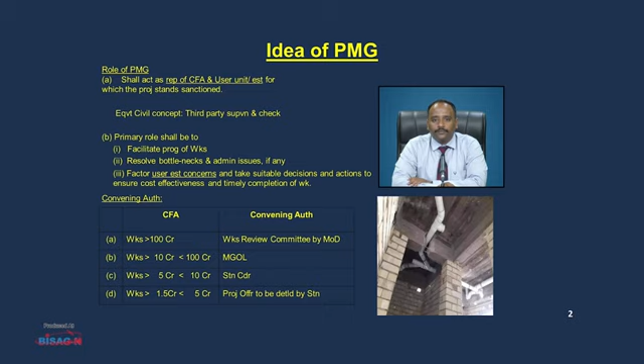What are the various do's for a PMG? The PMG needs to keep its ears and eyes open and use its common sense and involve themselves in the project as if their own house is being constructed.

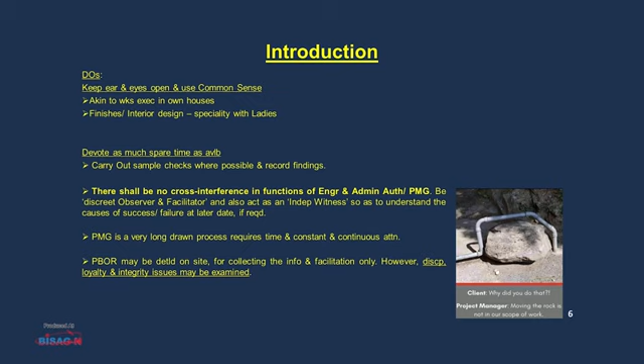The finishes, the interior design and the layout, or any of the modifications which need to be carried out as per the requirements, have to be incorporated and require active participation from the PMG. Also, maximum possible time has to be taken out by the PMG to carry out sample checks where and when possible, and record the findings.

There shall be no cross interference in functioning of the engineers or the administrative authority by the PMG. The PMG has to be a discreet observer and a facilitator, and also act as an independent witness so as to understand the various causes of success or failure at a later stage.

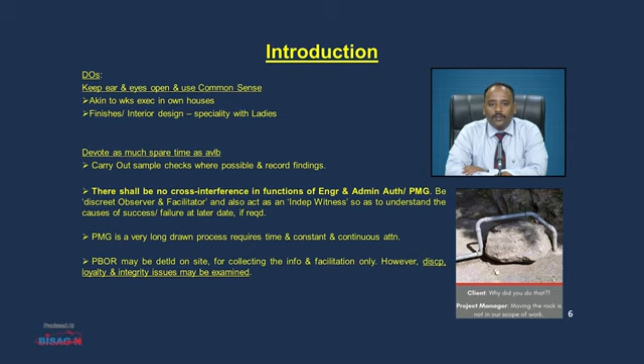The PMG is a long drawn process and requires considerable time, constant and continuous effort of various members of the PMG. The PMG should not discuss the issues arising or their observations with the contractor or his staff. They should be dealing with the various site executives or the engineer channel responsible for the execution of the project.

The contract is an agreement between the Government of India, represented by the Engineer Authority, and the contractor, and hence should not be intervened by a third party, which may lead to litigations at a later stage.

The PMG may remain in line with the work and avoid post checks, which is done by ADG-TE. This will avoid delays in work and should not become a hindrance for the work.

The PMG should not keep the GE, garrison engineer, or his staff engaged for a long period of time. Instead, the office of CWE or the chief engineer may be roped in to clear the doubts.

The PMG may not award an experience certificate or any kind of certification to the contractor or his staff or his vendors for the quality of work being executed.

The idealistic guidelines on the composition of PMG shall be: a presiding officer for the higher CFA works, preferably of the rank of brigadier. For lower CFA works, should be an officer of the rank of colonel.

A representative of the Engineer Authority should ideally be an officer from the chief engineer zone or the CWE, or an engineer officer from MES not below the rank of EE.

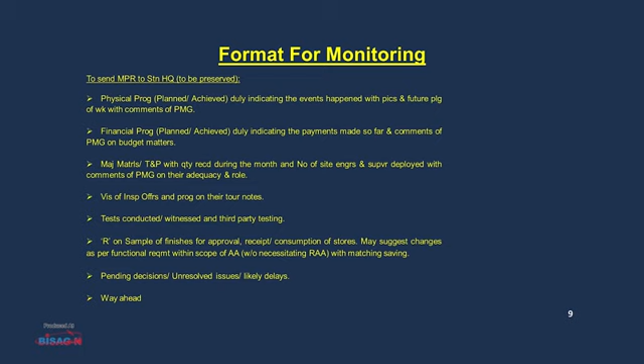Any format as deemed fit by the station should be used for maintaining various records of these PMG meetings, including the CPM chart by the garrison engineer, as the progress of work has to be incorporated while taking PMG on board.

The PMG should check timely initiation and offer comments on approval of samples and finishes, extension of job PDC, and contract PDC. The PMG should record the periodical meetings at least once a month or maximum once a quarter, as per the suitable format deemed fit by the station.

He should update himself with the CPM chart submitted by the contractor as per the progress of work, and ensure that the various approvals are taken on time. The documentation for extension of job PDC is processed in time. The assessment of the project has to be carried out, and any bottlenecks have to be mentioned in the reports regularly to keep the station authorities updated on the developments taking place.

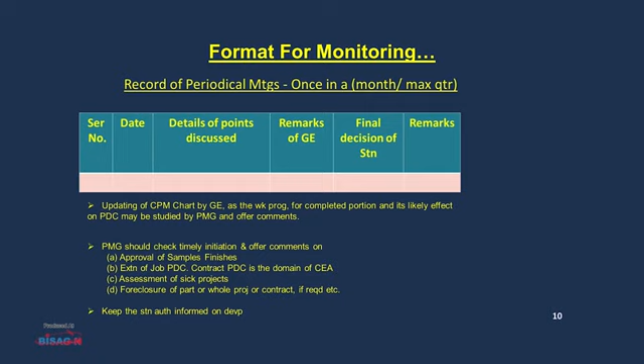The role of PMG at various stages of work: while identification of scope of work and listing of works in AMWP on accord of approval in principle, the PMG or the CO or the works officer of the user unit should finalize the draft site plan by the inter-se layout between various existing buildings, clubbing buildings to make one or few big buildings to save precious land, and finalize the entry and exit, VIP and inspection routes, and additional details of special works like SOC and RIC.

While preparation of the recce cum costing board for issue of AON and administrative approval, the presiding officer is mostly from the user unit. Site visit is a must at this stage. The plot should be frozen as per the zonal plan, not to be changed at a later stage to avoid delays in execution of the project. They are also responsible for preparation of the board proceedings.

Post the AA approval, that is the pre-tender and go-ahead sanction, the PMG is constituted. To maintain continuity, the presiding officer of recce, siting and costing board will be incorporated as presiding officer or member in the PMG. The activities post-tender, during execution, completion, handing-taking over stage, and the financial planning will have to be monitored by the PMG.

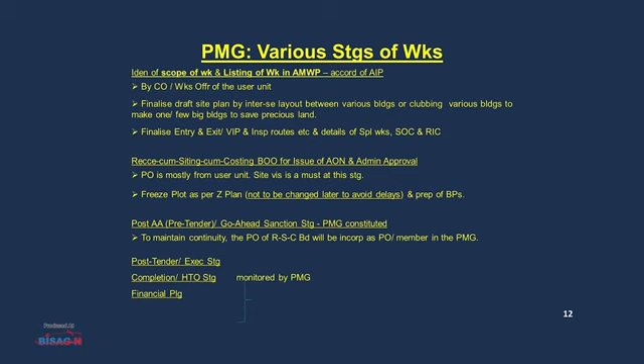During the pre-tender stage, the scope of work as per the board proceedings and AEs has to be ensured by the PMG. Grouping, configuration of buildings, layout without change in plot, preparation of floor plans for efficiently meeting the functional requirement, and its approval has to be monitored by the PMG.

Orientation, elevation, sizes, height clearance for various technical buildings, workshops, garages, specifications of floor finishes and pattern of tiling, their colors, camouflage scheme of the buildings, and driveways and approach roads have to be noted by the PMG. Siting of entry and exit gates, location of local headquarters, parking and various other services are also to be monitored.

Walk-through 3D BIM models, topo contour survey as per requirement, to visualize the assets and functional adequacy, has to be checked by the PMG. These aspects have to be monitored closely along with the competent engineer authorities, and an update has to be provided to the CFA or the station.

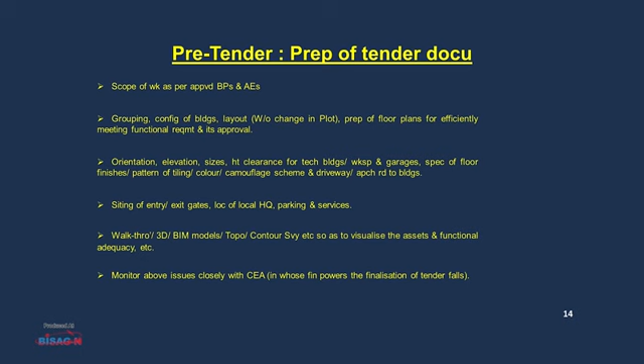Also in the pre-tender stage, the PMG should look into the process for obtaining statutory clearances like CFEES clearance, aviation clearances, coastal clearances, environment, forest, pollution clearances, and CGWB clearances for drilling of boreholes.

Also, the PMG should look into the clearance of hindrances of tree cutting by liaising with the DEO, vacation of buildings particularly falling buildings approved for demolitions, shifting of existing service lines falling within the site, and encroachments if any.

The PMG should look into finalization of works of state electricity, water supply and sewage boards for supply of electricity, water, and sewage disposal connections.

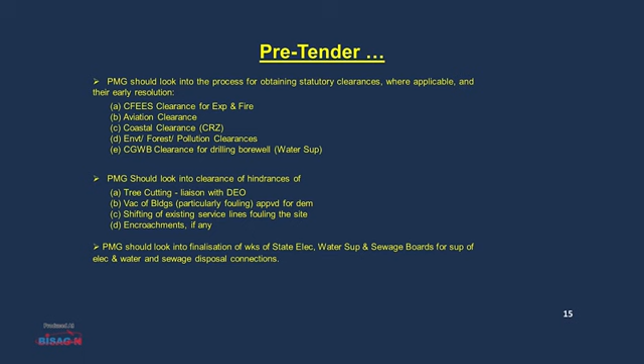The tender presentation meeting has to be attended by the PMG. This needs to be convened by the competent engineering authority before finalization of tender. All stakeholders, that is the users, PMG, CEA and executives, are to attend this pre-tender presentation meeting.

Phasing of tender, the urgency of phases, sample block, etc. are to be finalized and the milestones or yardstick has to be decided. Draft tender and drawings are studied by the PMG and deliberated in this meeting.

Furniture or built-in furniture as per the requirement has to be discussed. PMG should satisfy themselves that all user inputs have been suitably addressed and all the items of admin approval are covered in the tender. The scope, layout and specifications get frozen, and the tender is finalized by CEA after these deliberations.

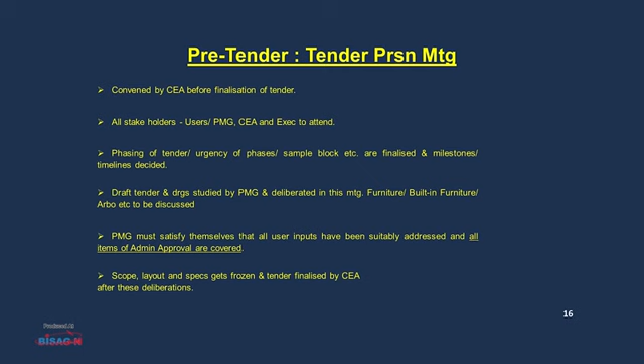Coming to the post-tender stage: while the setting out of works is carried out, the credentials of the contractors, deployment of site engineers, supervisor and labor, and obtaining various licenses and passes have to be checked by the PMG.

Also, the provision of electricity and water connections, their meters, and other aspects like the storage facilities for the contractor have to be checked and recommended by the PMG. The setting out of works and clearances of hindrances has to be facilitated by the PMG.

Monitoring the important stages of execution, maintaining photographic or video records of the work has to be carried out. Briefing the inspecting authorities and ensuring presence during their site inspection has to be ensured by the PMG.

Siting of all buildings, security, compound wall, fencing to avoid blind zones at the turning and at the entry and exit, at the commencement of execution has to be arranged.

Physical marking, layout, drainage plan, road network, fencing, wall at site, and finalization of plinth height with reference to the flood levels and road levels has to be checked and confirmed by the PMG.

Physical marking of all existing services on ground to facilitate execution of all services concurrently wherever possible.

The PMG has to ensure that, as per the contract agreement, latest and state-of-the-art tools and plant and qualified tradesmen are being employed by the contractor.

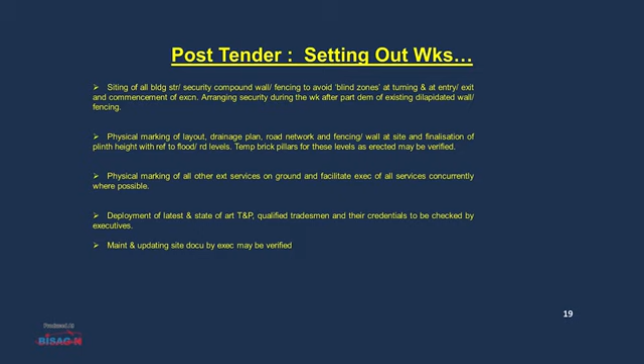Also, the PMG has to time and again check the maintenance and updating of site documents maintained by the executives.

During the foundation work, the credentials of the soil testing lab and its report, verified by the GE, has to be checked by the PMG. Proper concreting using RMC in foundation and plinth beams, being hidden work, has to be checked for its curing, and sufficient photographic evidence has to be maintained.

While executing the masonry work in the foundation, DPC, proper anti-termite treatment and maintenance of its record has to be carried out. Supervision of digging of trenches for foundation, as unmonitored digging may lead to additional expenditure, has to be checked by the PMG.

For the various samples recommended by the garrison engineer, approval has to be taken from the PMG, also for samples and the various finishes to be obtained.

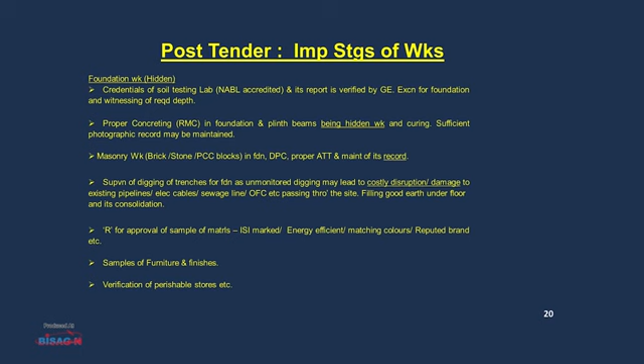Routine check of various perishable stores has to be carried out by the PMG.

While the superstructure is being executed, various aspects to be monitored by PMG are location of doors, windows, ventilators and fixing of their frames. For the RCC work, the formwork, steel reinforcement, and leakage of cement slurry has to be checked.

The layout and location of wiring conduits, switchboards, light fittings, plumbing and fitments, sanitary fittings layout has to be checked. Waterproofing treatment of roof has to be verified.

Also, the sub-base under floor, wearing course of floor, and pattern of tiles has to be checked. Plastering, priming coat, putty, number of coats of paint, and pattern has to be approved by the PMG.

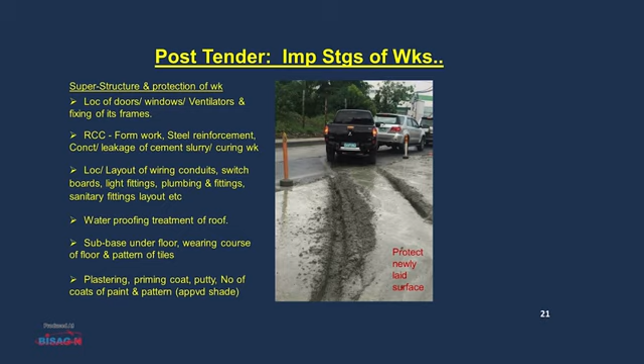Testing and commissioning: the PMG should witness various tests conducted at site, outside the laboratories, by the garrison engineer and various executives, and endorse the readings.

The garrison engineer should ensure satisfactory conduct, and PMG may witness verticality test of the buildings, strength testing of concrete bricks, sieve analysis tests, ponding test of sunken floor, pressure test of water supply pipelines, smoke test of sewage lines, earth pit, continuity test for electric lines, safety mechanisms, etc.

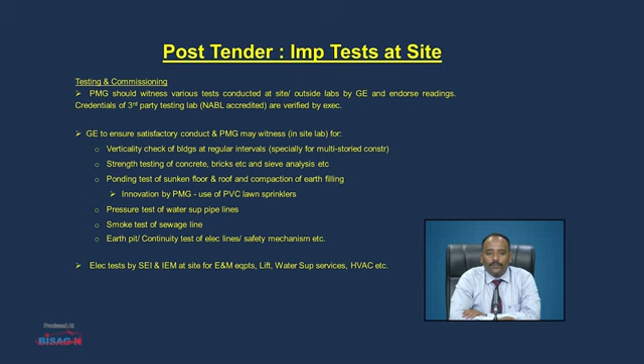At the completion stage, the PMG should verify completion of all activities, and should commence the handing-taking-over process sufficiently well in advance.

Verify the site clearances, disposal of debris and additional soil obtained during excavation, and verify the surrender of passes which have been taken for various labors.

Also, the various defects which have been identified have to be rectified before the expiry of the defect liability period, and the guarantee against waterproofing and anti-termite treatment has to be obtained.

The role of PMG in financial planning and progress: the PMG can verify carryover liability, the demand of funds, allotment of funds, and their subsequent expenditure.

Each contract specifies DO limits, generally 10%, subject to availability of funds in the administrative approval. This mainly caters for variation in quantities, unforeseen eventualities, and unavoidable technical changes, etc.

The PMG should play an active role while these are prepared. Expenditure should remain within the 10% of administrative approval, as expenditure beyond 10% is very difficult to get regularized.

Suggestions of the PMG should be carefully projected so as to maintain financial health of the project. Generally, revision of AA is not granted by the CFA after acceptance of tender, until there is a compelling reason.